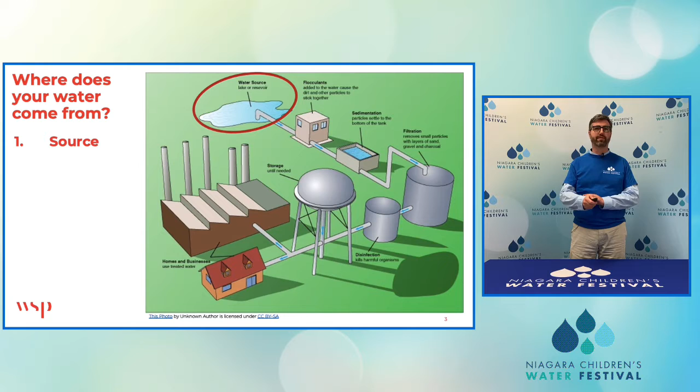So this is a simple schematic here about where your water comes from. And again, if you're in the Niagara region, it's probably Lake Ontario, Erie, the Niagara River. Niagara is blessed with a lot of natural resources, which is fantastic. In our specific case, we're talking about Lake Ontario. So we get it from the source. What do we do next? Well, we have to treat it. We have to make sure it's what's called potable water, so it's safe for us to ingest into our bodies, swim in it, bathe in it, all that super good stuff.

So after we treat it, we then need to store it. You'll probably notice in the mornings, in the evenings, and at lunchtime, you typically use a lot of water. And so we have to bring the water in, we have to treat it, and then we have to store it so it's ready to ultimately be distributed into your home. So, a little bit of a theme here: the storage, just imagine that as a lake. And essentially what we're building on our site is a giant enclosed lake which has safe, clean water.

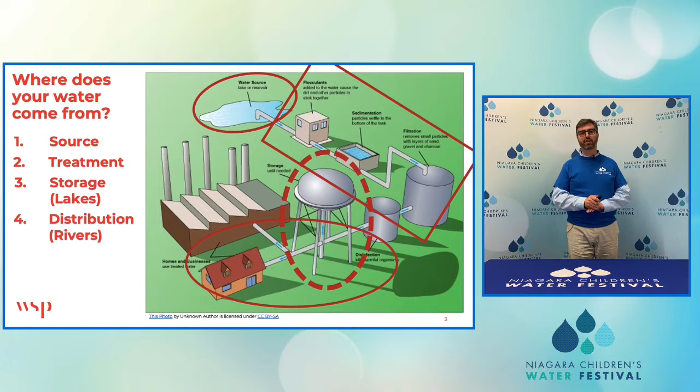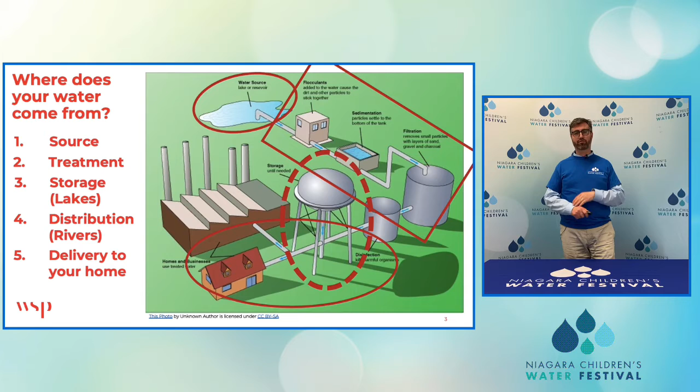We then talk about some of the rivers. What we mean by that is the subgrade pipe networks and how water enters into your home. That's a bit of a theme here. And finally, after all that, source water, withdrawal from the water source, treatment, storage, distribution through those as-built, as-constructed lakes and rivers goes straight to your home. Okay. All right, so we're going to get into some of the specifics here.

So this project is specifically for Grimsby as well as Smithville, both within Niagara. So I hope some of you are from those communities and are excited about this. So we have our water source here, which is Lake Ontario. And our treatment plant is the Grimsby Water Treatment Plant, which is right by the QEW. It's that nice architectural brick building. So hopefully some of you have seen it when you drive by.

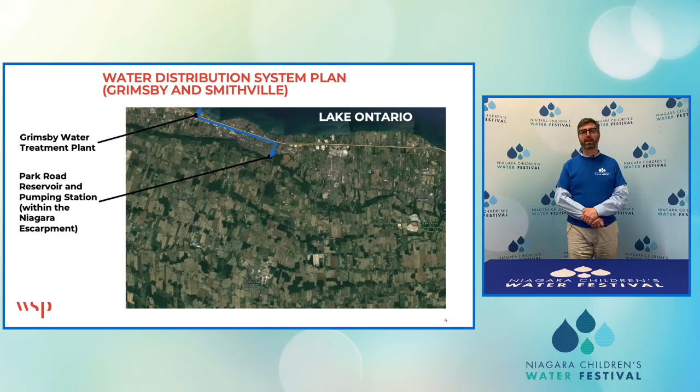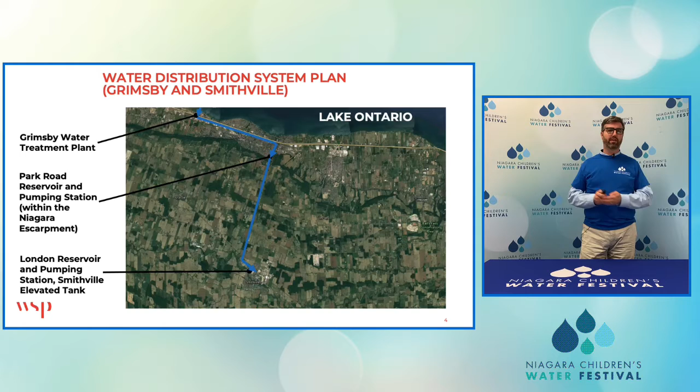One of the rivers, or man-made rivers, out of the plant is shown in the blue there, and that's a transmission main. So that's an underground pipeline which takes water from the treatment plant all the way up to what will soon be our project site. At our project site, we convey water following storage all the way up to Smithville. So this starts in Grimsby, finishes in Smithville, and our project site is about halfway through. What we're doing is enhancing water supply and distribution throughout these communities. That's the crux of this project.

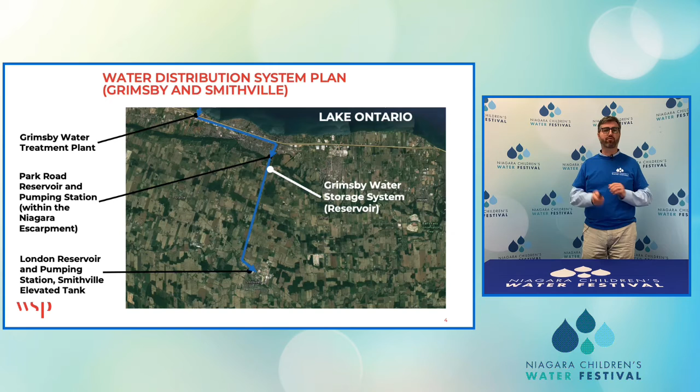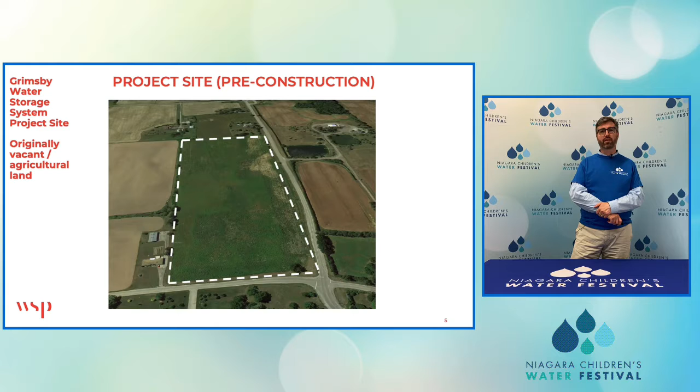Here, and if you're familiar with Grimsby, we're at the top of the Niagara Escarpment, right on some past agricultural land. So this is the vacant site, and this site was like this about 3 to 4 years ago before construction started. And we'll be taking you around the various stages of construction. So we have a vacant site right here. And here's our goal. Here is what we're building on this.

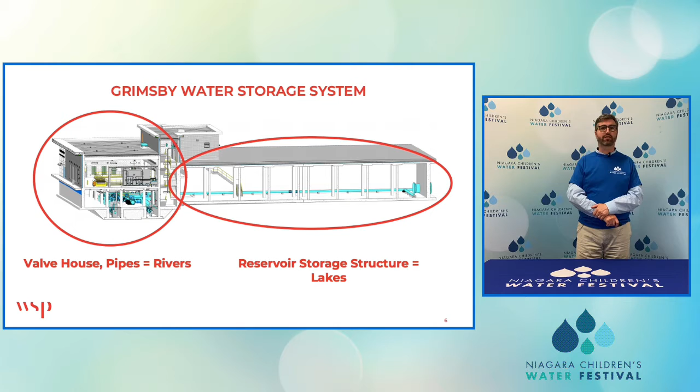We're building a valve house. And think of the valve house, that's the pipe system. That's what connects the treatment to the storage and ultimately onto your home. And then we're building this nice big reservoir. The reservoir is about 15 million liters, so about 15 million milk bags. Very large capacity. Think of that underground structure, that's an as-constructed lake. So we have our rivers and our lakes. So we're taking them from the natural to our as-constructed, straight to your home.

So what we're gonna do now is talk a little bit about construction safety. We're gonna take a virtual tour of our job site. But before we do that, I just want you to think about a few things here. On construction sites, there are a lot of hazards. Those hazards aren't a whole lot different from some of the hazards in and around your home. You've probably heard your parents saying, make sure you have your bike helmet, make sure you open your eyes, make sure you look both ways before crossing the street. All that is highly important when we go to our job site. So I'm just going to flash a few things up, but if you want to take some time and think about it, we'll just go through it slowly.

But one of the first things we do is we make sure we're appropriately dressed. So one of the things that we'll see when we go on our job site is all the safety equipment I have on. It starts from your head. It's the most important thing to protect your head. So we have hard hats. We have bright colored clothing to identify us. We have safety boots because we don't want to step on any nails or any sharp pieces. So that's the first thing. We definitely want to remain safe.

Some of the other things is there's a lot of big, heavy machinery on site, especially this job site, and you'll see that on our tour here. So we always want to keep our eyes open. We always want to identify with those operators what we're doing on site, what the purpose is on site, so that they're aware of us. Same thing when you're crossing the street. Your parents have always said, keep your eyes open, make contact with the drivers. Similar thing here. Safety first, and if anything ever does happen, we want to make sure there's always someone on site who knows first aid and could call an ambulance if needed. But we're going to be safe, so that's not needed.

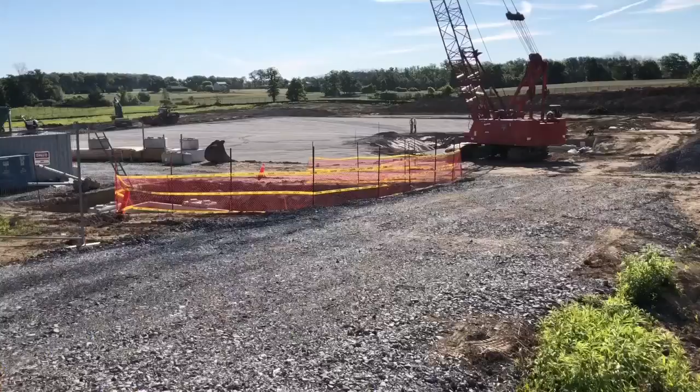So again, I'm standing right on the northern section of the site. First thing to notice, this is Park Road. We're doing water main construction on the road, and they have what's called traffic barrels up, to help with traffic control so that the water main could be installed safely. I'll just go around and start to survey the site a little bit here. We've got our site trailer back there in the distance. We have a storage area or a laydown area. That's for pipe and concrete, shoring and reinforcing bar to strengthen the concrete.

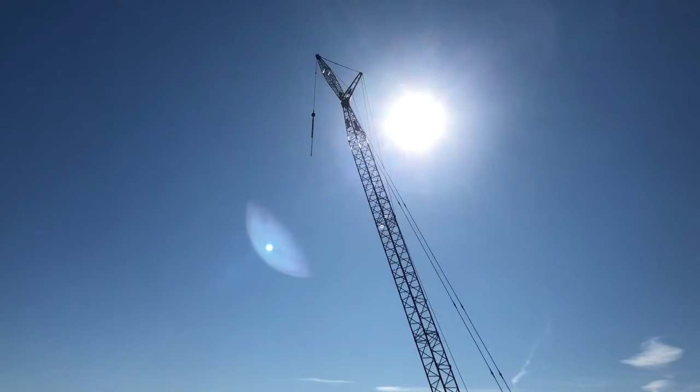As you can see, there's a couple excavators on site which are grading. That flat area right there is all granular material. That forms the base of the reservoir itself, it's structurally compacted, and that will be where the cast-in-place concrete for the reservoir cells is located. If we go further along the site, that's a very large crane. That crane is used to put in formwork and falsework and help with the construction of the reservoir. And over there is where our valve house is going to go. We're going to walk a little bit closer there, introduce you to our drone survey crew, and show you some other aspects of construction of this reservoir.

All right, awesome. Hope you enjoyed a little bit of a site tour there. We're actually going to go back to this job site. We're going to fast forward a little bit in a bit and give you a drone's eye view. So this is the sort of fun part. I hope some of you are interested in drones, and maybe you even have some drones at home. So we'll talk about that. We'll do a bit of a Q&A session.

But what do drones do for us on site? Well, they can provide us with a bird's eye view of what's going on, things we now can see in the air that we couldn't, help us for quality. But we also have specialized cameras on this drone that we're going to go on. And we'll get into that in a sec, but it can be used on topographic information for us to measure elevations, which is really cool, but also spatially too, to make sure our job site is laid out. And so we could use these to ensure quality on our job site.

This exact drone that we have right now, there's some specifications on it right there, but it's got a flight speed of about 16 meters a second, or about 36 miles an hour. It's about how fast a car should be going on your local residential street. Flight time is about an hour long, so it's battery powered. It's got the ability to fly for about an hour. The maximum altitude on this is about 400 feet, or about 120 meters, which corresponds to approximately the height of that large high crane you saw on site. So when we do take our flight, that's how high we'll be flying at.

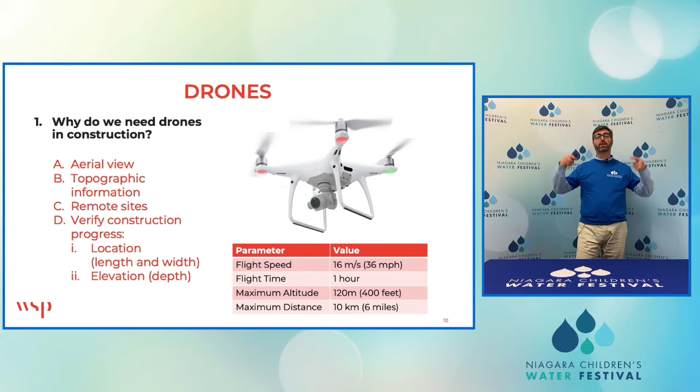And the maximum distance is about 10 kilometers. So that's why we launched this drone on our job site. We usually want to maintain visual contact with your drone always. Same thing with the one you have at home.

So before we do our tour here, this is actually an image that our drone has captured. That's an actual image. So you see those two large concrete faces. Those are basically as-constructed lakes. Think of them like that. They're about 120 meters by about 150 meters. That small little square at the bottom, that's our valve house. So we talked about the rivers, we talked about the lakes. You see here some of the circular stuff, that records each of the drone's flight paths. So we're taking the aerial image and we're tracking how we fly, how high we fly, what times of day to monitor construction progress.

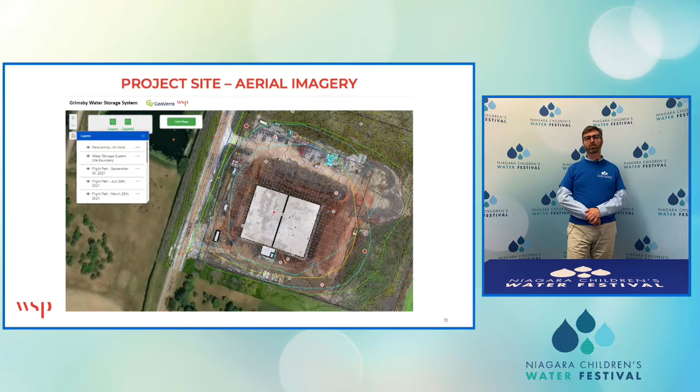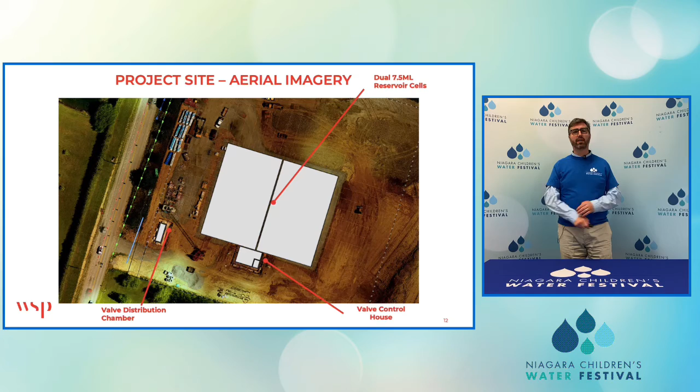So one of the things we talked about is spatial location. So we want to ensure quality in our job site. How do we make sure that those reservoir cells, those as-built lakes, are exactly where we want them to be? Well, here's what we do. We take that drone footage and we overlay our images, our design, on top of that. And as you can see right now, the dual-celled reservoirs, those as-built lakes, as well as the valve house, are in the exact right location that they need to be. So we know that that's really good. So one, it's in the right location. So that's awesome.

So when we talk about grading, we talk about elevations. And those elevations are all relative to sea level. So we already went through that it's built in the right location. We want to make sure our drones capture the right elevation, so we know for sure it's being built according to our specification.

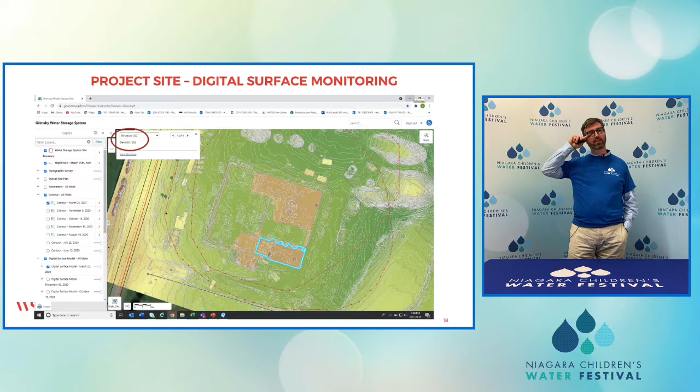Well, here's what we do. The drones just don't give a visual image. They'll give something that's called an orthographic image. And you can see here those different colors of greens and yellows and brown. That's an indication of how high the as-built elevations of our reservoir are. So you can see here, I've actually clicked on the ceiling height, and you can see the ceiling height there. I think it's about 202 meters in elevation.

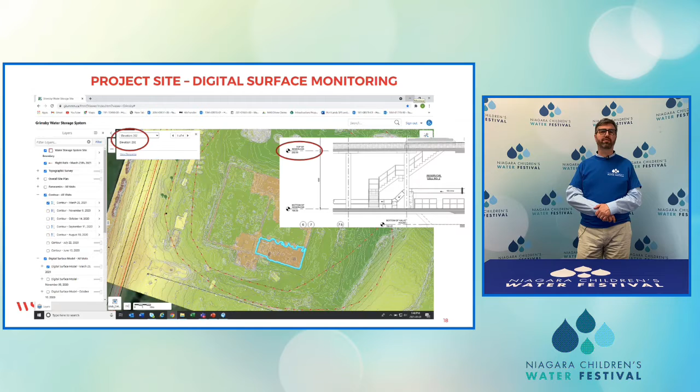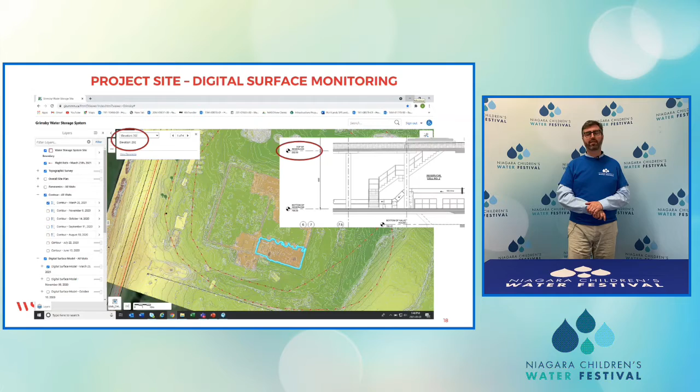So what I've then got now is our as-built drawing. And I'm looking at the as-built drawing, and I'm seeing about 202 meters in elevation. So that's how we use drones. So I know the as-built construction is exactly the same as our detailed design. So that's highly valuable. The contractor in this case has done a very good job, located the reservoir exactly where we wanted it, built it to the exact elevation. So we've got a high degree of confidence that this has been built exactly right.

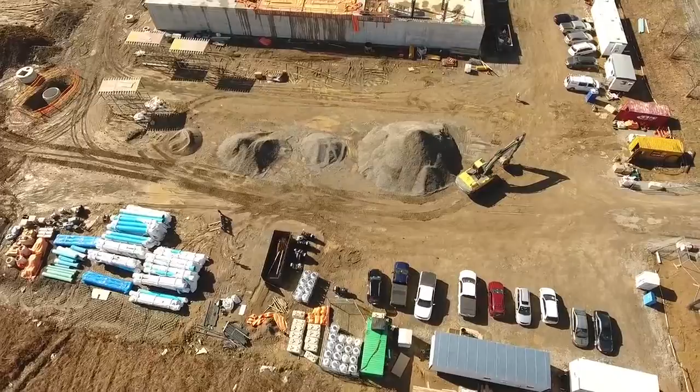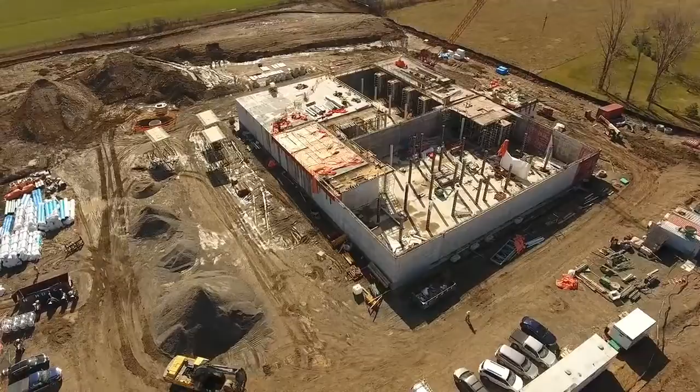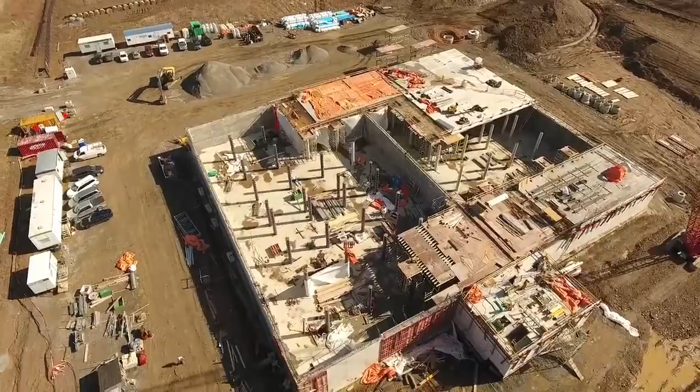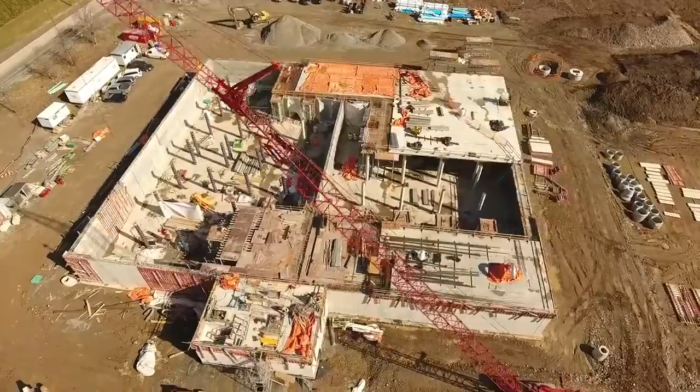You also see on the north end, that's the large crane. So that crane has a capacity of about 100 meters. So we're flying right now about 100 meters on top of our reservoir. And we'll just continue to rotate in. Again, you see all the columns, lots of concrete, lots of steel and rebar in this construction. Again, we're going just past our crane. That's a big, huge crane. We're just doing a 360 view.

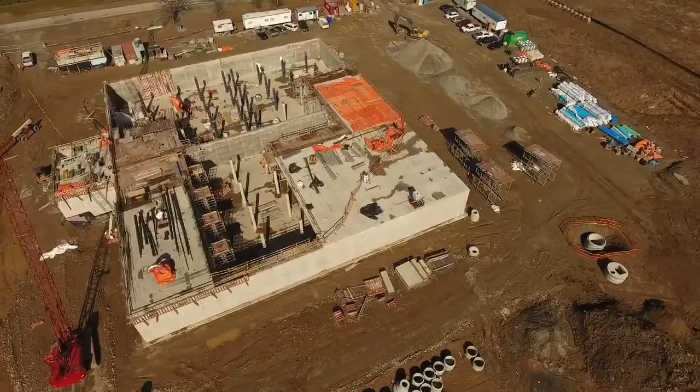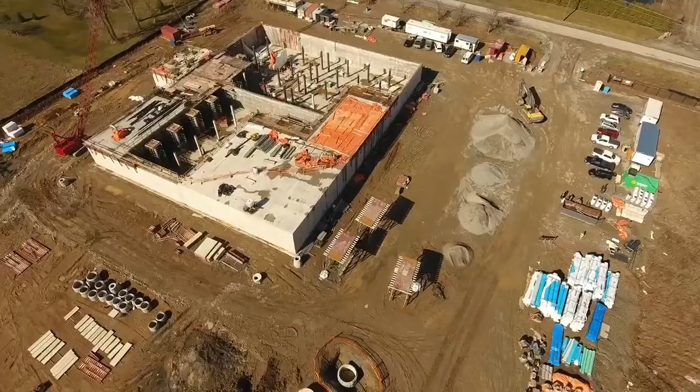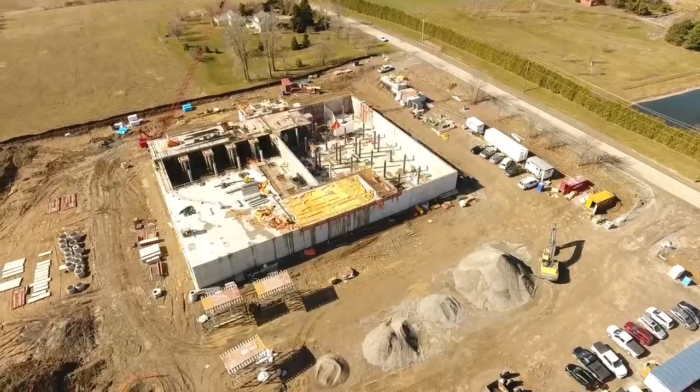You could see there on the right-hand side all the concrete circles. Those are actually maintenance holes. They aren't placed yet, but they will be. And that's to take the groundwater away from our reservoir, because we want to keep what's inside very neat and clean. Again, you can see on the right-hand side, those are all our pipes. They're to be installed, connecting that reservoir to our distribution system, to some of the existing lakes and rivers that we have in the area. Lots of activity on site. So at any one time, we may have 50 different specialized contractors on site to help get this built.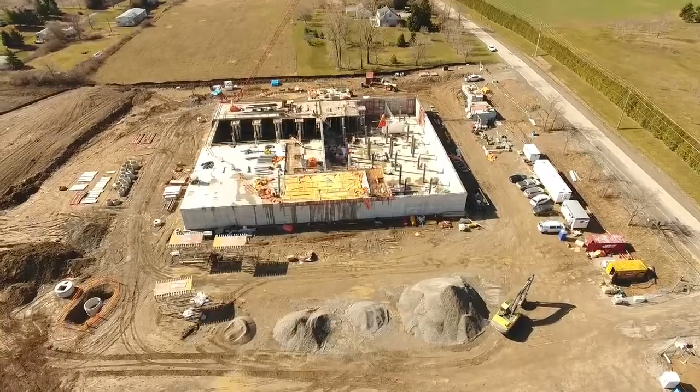Yeah, so that's a great aerial view. And that's where I want to conclude our presentation right now. So, very, very happy to take questions. I know we've got some time for questions, so before we talk about our take-home water activity, very happy to take any questions that you have.

Awesome. Thank you so much, Dean. That was amazing. And those videos are awesome. So we do have a couple questions. From Mrs. Smith's grade 3 class, they're wondering, do you deploy drones remotely from your office to complete the survey work? And if so, what is the range?

That is a good question. So the range on them is about 10 kilometers, but because these are very expensive drones with highly expensive equipment on them, we like to maintain a visual at all times. So whenever we do this, we take them to the job site, we set up within about 500 meters at least of where we want to be, then we deploy the drones to always maintain visual contact.

Awesome. And Mr. Courteau's grade 4-5 class in Beamsville is curious to know, how many drones does your company have for work like this? That's another great question. We're constantly upgrading our drones. We usually get 1 or 2 new ones every year. At any one time, we may have 24 drones we could deploy across Canada for any one of our projects. In Ontario, we probably have about 3 or 4 that we actively use on our job sites.

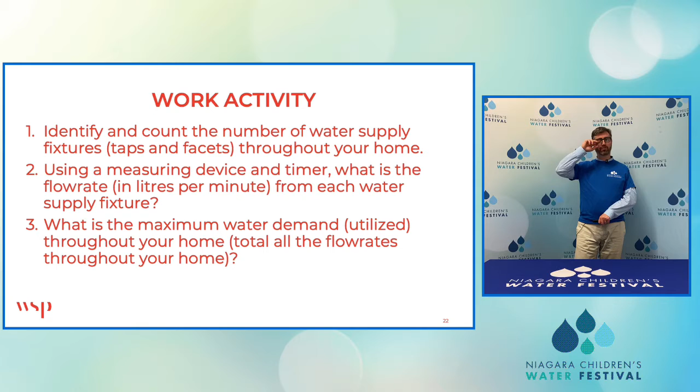So just a few things to talk about how much water we actually use a day in our house. So one of the things is when you go home, just walk around and count how many fixtures you have. And what I mean by that is how many water taps. So how many sinks you have, how many showers you have, if you've got other hose bibs outside, just count how many. And then with each individual one, grab a measuring device, could be a measuring cup or a bucket. You'll also need a stopwatch. Lots of you, like my kids, have iPhones.

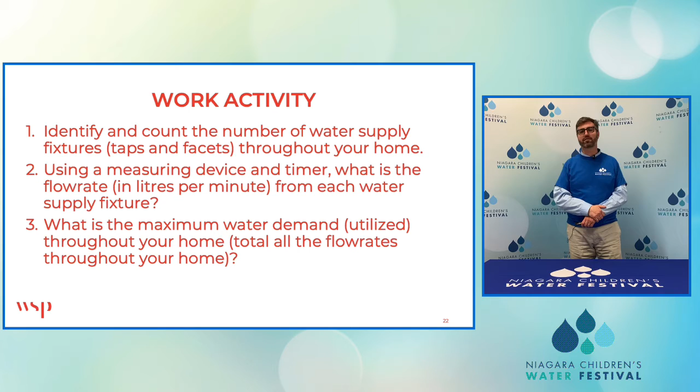Put the faucet on full, measure the volume over the time, and then you'll get a flow rate, the maximum flow rate or the maximum water demand in your house. And that's what I would like each of you to do, to give you an order of magnitude about how much water your family uses every day. So again, voluntary, would love it if you do it. If you do take the time to do it, please submit it through your teacher, and your teacher will get it to us via Niagara Region. So thank you very much.